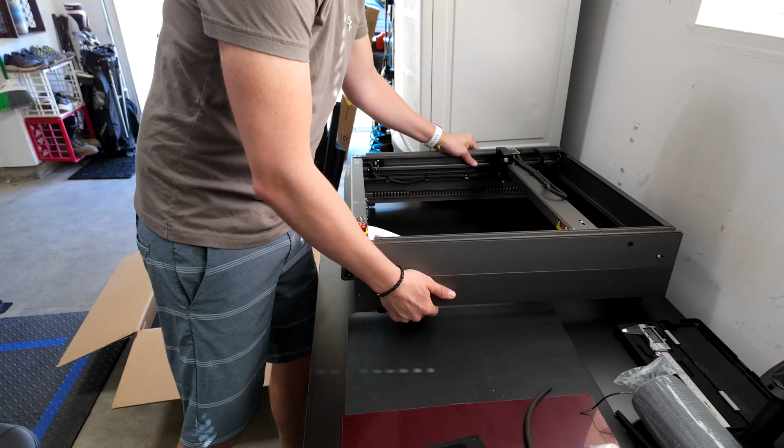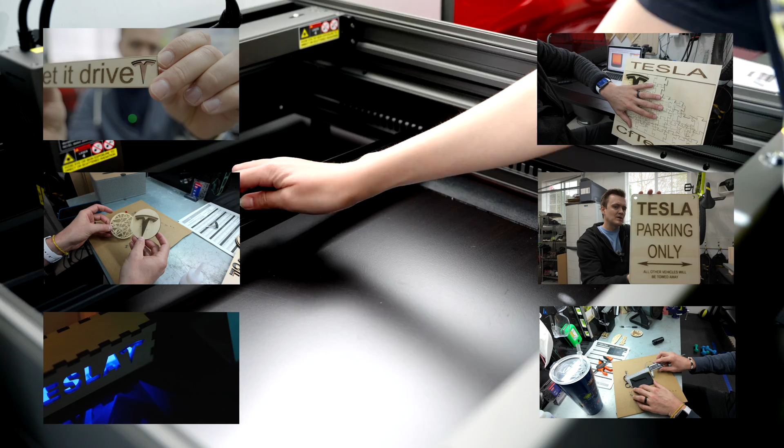I've listed everything right here on the screen. You can see the 4, 5, 6, I don't know how many it's gonna end up being, different projects that I've attempted to make here or engrave. I'll have some different kinds of projects I'm gonna try and make, and then I'm gonna engrave different things with neat designs. Now keep in mind, I have never done anything like this before, I've never used a machine like this. So on this journey I've learned a ton. If you're watching this video, I've had this thing for about a month and a half to 2 months, so let's hope the stuff you see only gets better from here. But what will be impressive is the capability of a machine like this.

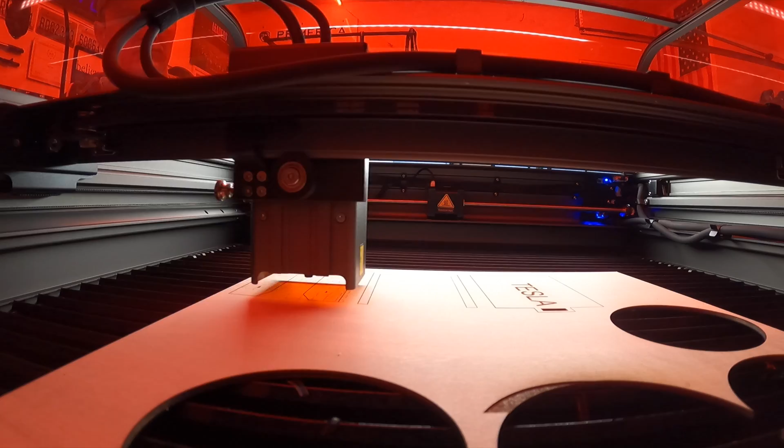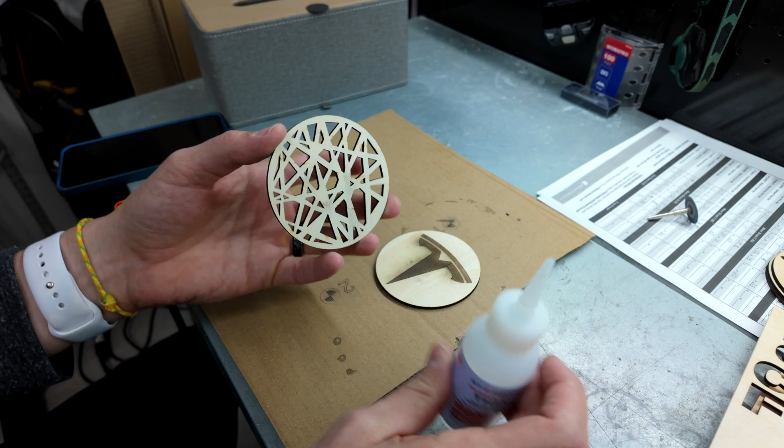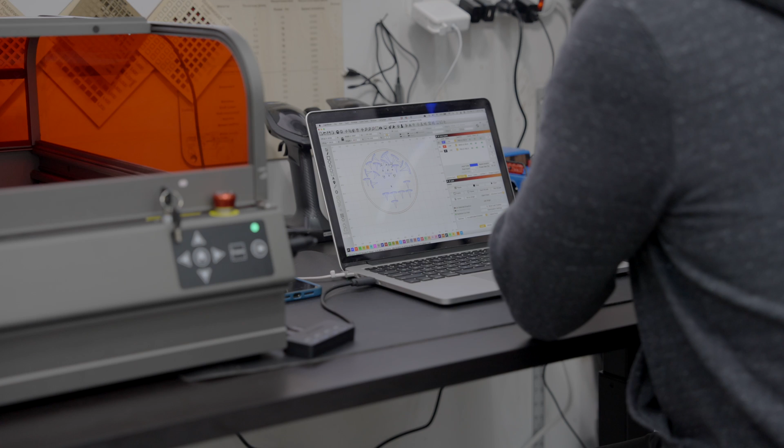So let's get started with my first, I guess, Tesla accessory. My first project that I wanted to make was a coaster because I figured it'd be pretty simple and there was a lot of different ways I could learn how to use this machine. I made a couple different designs, from just a little squiggly line pattern to an actual Tesla symbol engraved in a very plain circle. I then totally unplanned decided to glue one onto the other, putting the Tesla symbol kind of like in a little cage behind it, which came out pretty cool and was kind of fun to look at. But I really wanted to test just how fine this laser cutter could actually cut, so I wanted to make something a little bit more intricate, so I started off making a new design.

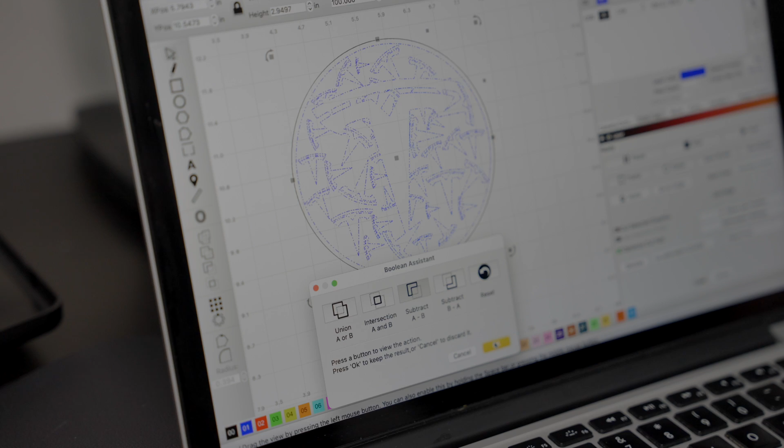The first thing I did was hop on a software program called LightBurn. I started putting little Tesla symbols all over in the circle, and very quickly, as you can see, it started looking just like a pizza. But I do like my Tesla and I do like pizza, so I figured let's keep pushing forward. To counter the anchovy-looking Tesla symbols, I took a large Tesla symbol and stuck it right in the middle, hoping it would make it look just a little bit better, which you'll have to be the judge of later - I'm still undecided. Then, using the super impressive camera feature inside of the Falcon2 Pro, I was able to place it exactly where I wanted it on the piece of wood inside the laser cutter. Then I pulled up the live view and waited very impatiently for it to finish.

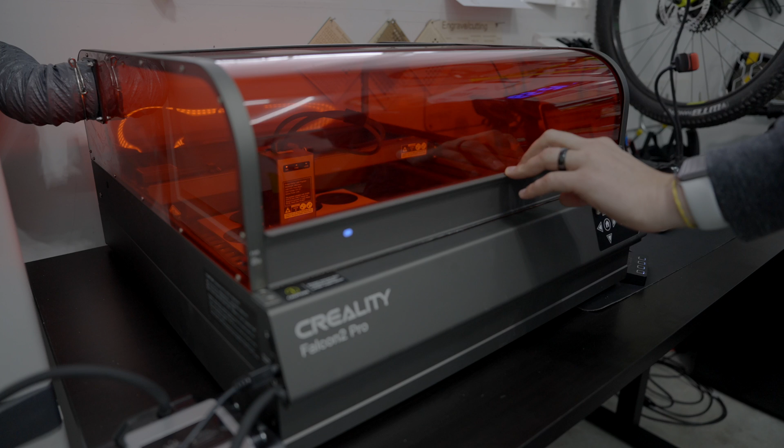All right, it just finished. It took about 3 minutes, and take a look at this detail. Look at this - it is just insane just how sharp it actually was able to cut that. And watch this - that slid right out of the middle just perfectly. And this thing's pretty cool too, it's like a little Tesla symbol tree.

All right, so after a few different failed attempts, here's the final result for my coaster. Using a total of 2 different circles, I started off with engraving the Tesla symbol in the middle, then cutting out all the tiny little Tesla logos all around it, and then cut out one large circle for the back and simply glued it all together. And I think it turned out pretty cool.

The next project I'm gonna try to make is an actual key holder for your fob. So you have these little Tesla car keys that we all use, and it's nice to have something like this to slide them into when you're going to things like valets and whatever, to hold them.

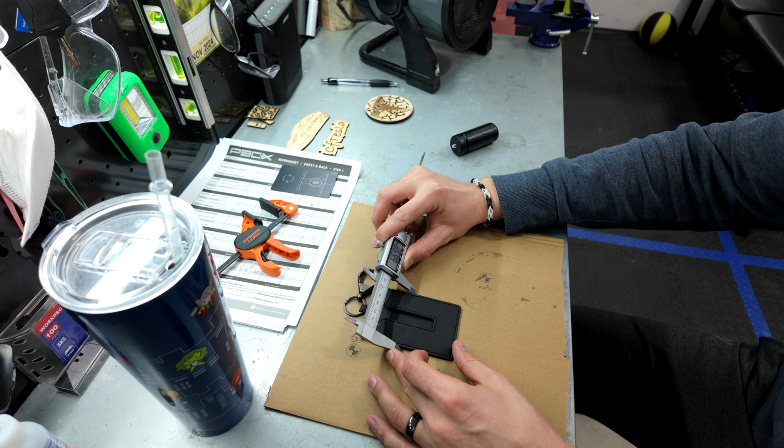Now I don't have the proper materials for this because it's gonna end up being super thick versus super thin, but we're gonna do it anyway as a fun little challenge. To get started, we're gonna get all the right measurements, both the length and the width. The thought is that I'll print out one square in the back, cut a really thin layer around this edge to give us a little bit of depth, and then cut this design in the front so we can slit down into it and try to duplicate this exactly. Of course, we'll put in the Model 3 symbol and maybe some Tesla logos as well. I've got the wood all ready to go. I'm not really sure how this is gonna turn out, but I'm pretty excited to find out.

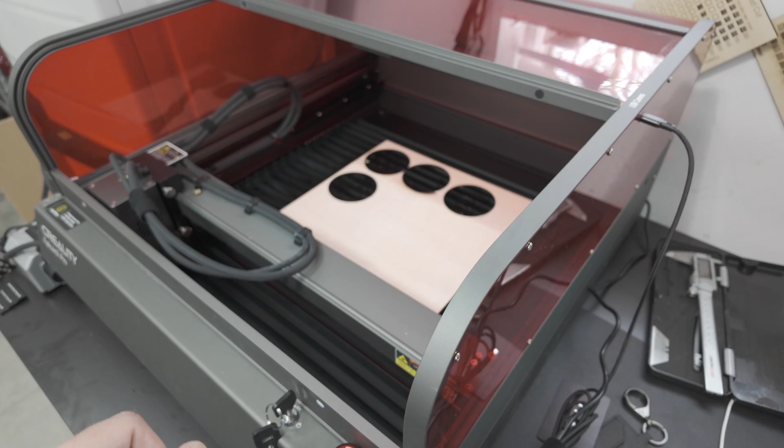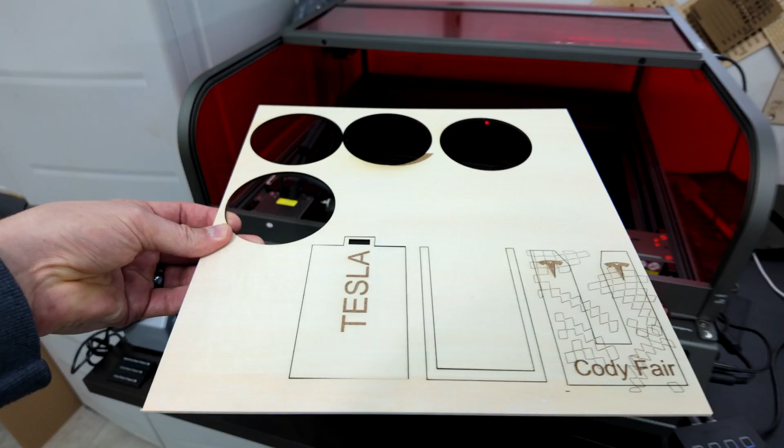All right, check it out. They're all ready to go. So this is all the different pieces right here. If I lift this thing out, hopefully these will all break out of it, which they all easily did pop out. Get this last little piece.

So this is gonna end up looking like this. We'll have this piece down there, then I'll glue this in the middle. See, I told you it's gonna be thick. And then this piece will go on top like that. Of course, like I said, you would really be making this with something like leather, not with this, but it still can show you what this thing can do and what you can make with it. So this is gonna be kind of fun. Let's glue it together. And there it is, our Tesla keychain holder.

We got a little slot for our card. We got our place to hook it to our keychain. We got our cool Tesla logos. We got our design and our name on there. And that was pretty fun. Of course, if this was made out of leather, this would be all much tighter, and we wouldn't worry about the phone or the card actually sliding out of there. But the concept worked. I just need to get some leather to try it.

All right, so for my next challenge, I'm gonna be making bookmarks. I'm a huge reader, I love reading. I read literally every day for hours - well, maybe not hours, more like minutes. And it's actually really not reading, it's more like listening to audiobooks. So I'm gonna make some bookmarks out of wood as well as making some out of acrylic.

So take a look at this one. I made this one out of wood for my Let It Drive clothing brand. Pretty cool, huh? I mean, it's not super cool, it's actually pretty basic, but take a look at the Tesla symbol - this is what I wanted to show you. Focus. Look how precise this 22-watt laser was able to cut this. That tiny little piece of wood between the top and bottom of the Tesla symbol, it was able to cut that and not break. I don't know, maybe that's not impressive, but I'm impressed.

And now inside of here, I had it cut the exact same thing with acrylic to see what the difference is. So let's give it a try. Right now, this is what I have with the acrylic, just a basic outline for the bookmark.

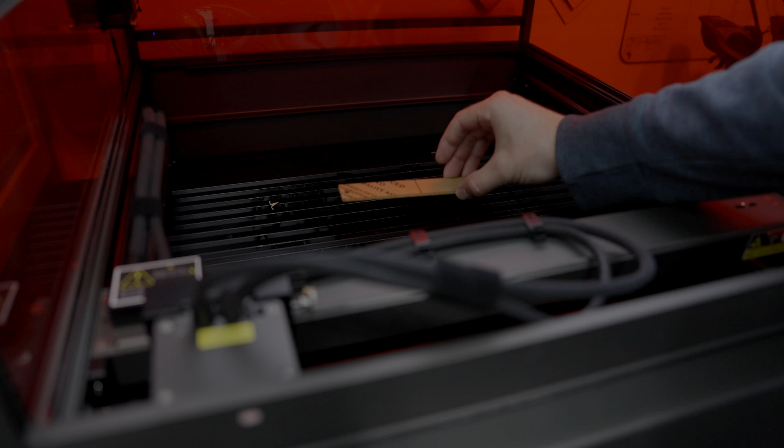So next, to get the engraving on the front of this, I'm gonna use my favorite feature about the Creality Falcon 2 Pro, which is the camera. This makes lining up what you wanna put on here just so simple. Check this out - I'm just gonna set this on here just the way I like it. Because you get all these customizable little bars in here, you can make them narrow or wide apart depending on what you need. So I got 3 right here nice and tight together.

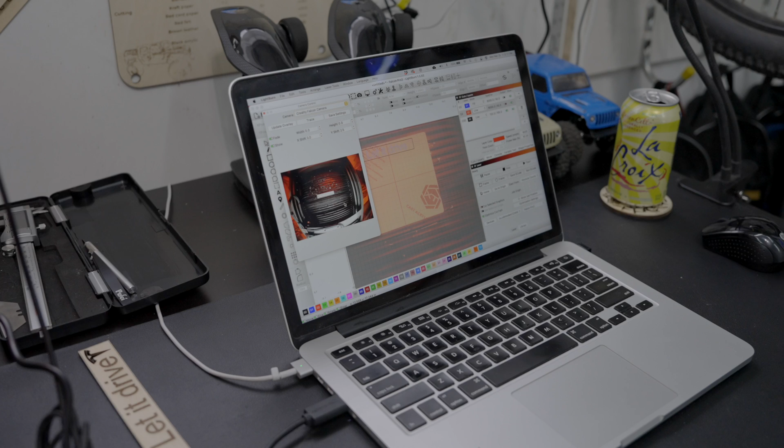I've got this placed on there the way I want it. Now I'm gonna come over here to my camera controls, and you can see here, I've got a live view of what's going on inside of the laser cutter. So for example, I put my hand in here, you can see my hand is right there - it's a real live view. And what I can do here, I'm gonna slide this back over here, is I can hit update overlay.

That's gonna take a right-now snapshot of what's currently going on inside of the laser cutter. As you can see, my piece of wood is right there. Now all I have to do is grab my object that I made and overlay it exactly where I want it, which is gonna be about right there.

Now, because this has an enclosure, even though I've framed it up and it's ready to go, all I have to do is click start on my computer. It won't start right now because this is opened up. It's a really nice safety feature so you're not gonna blind yourself, because with the way this is set up, you don't actually need these fancy safety glasses. It's fully enclosed all the way around—sides, top, everything—so you get viewing angles from every direction. But once this is closed, you see it turns on, and now it's ready to go, and I can stand right here and watch it.

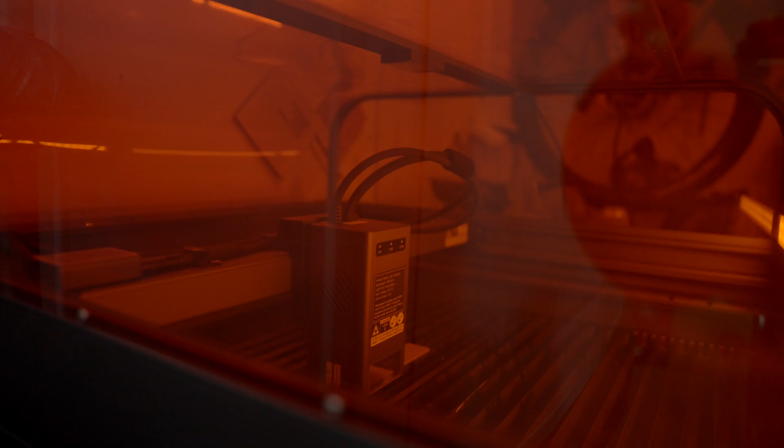So let me show you what's going on here. This right here is an air pump, pumping air through this tube—I don't know if you can see it too well with the glare of the window, but it's going right there onto that tube on top of the laser cutter. Then you get this ventilation right here, and inside there's actually a fan. I have that run all the way behind here, and it's ventilating out my window right here.

The way I have this set up, if I'm gonna be working out or doing something else in here, I can just pull that out, close the window, and then hook it right here on this little nail. I also went and bought this stand-up desk so it can be lower or higher depending on the kind of work I want to do at the moment. So I'm pretty excited about this little workstation.

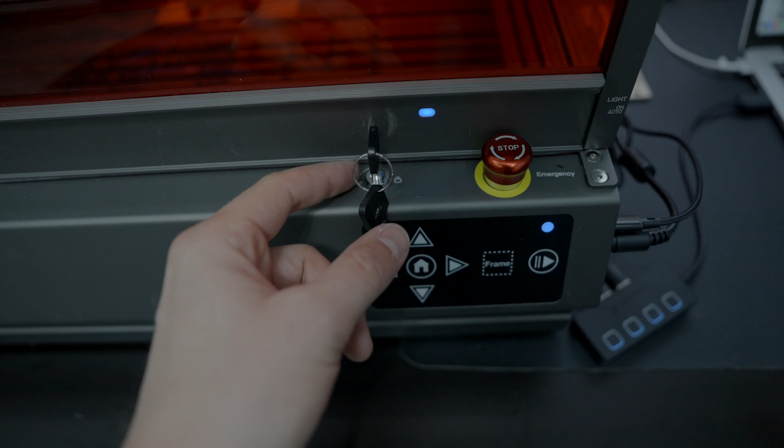You also have this safety shut-off. You can lock it right here so no one else can open this up, get hurt, or use it. You have the option to make the light auto or just stay on—there's a bar light down underneath here. Same thing over here with the fan; you can have it set to auto or just turn it on.

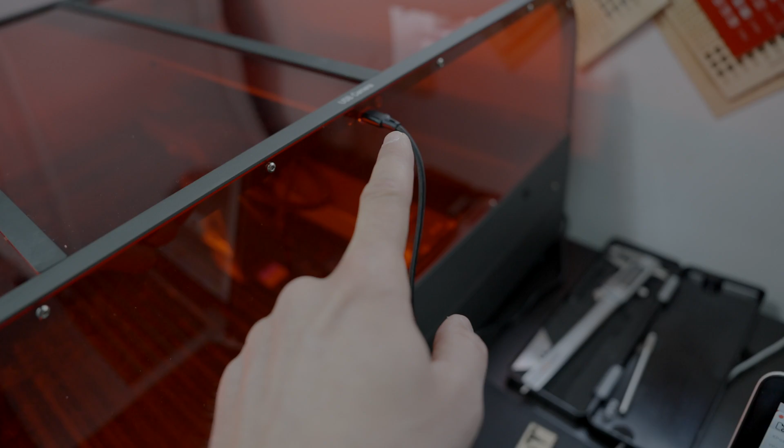And then here's how all the connections work. So you have your power, then you have your USB-C connected to my little USB dongle to my computer. The other cord connected to the dongle goes up here to the USB-C port that goes straight to the camera—a really fast connection, works flawlessly every single time. And then of course it goes to my MacBook, which is running Lightburn.

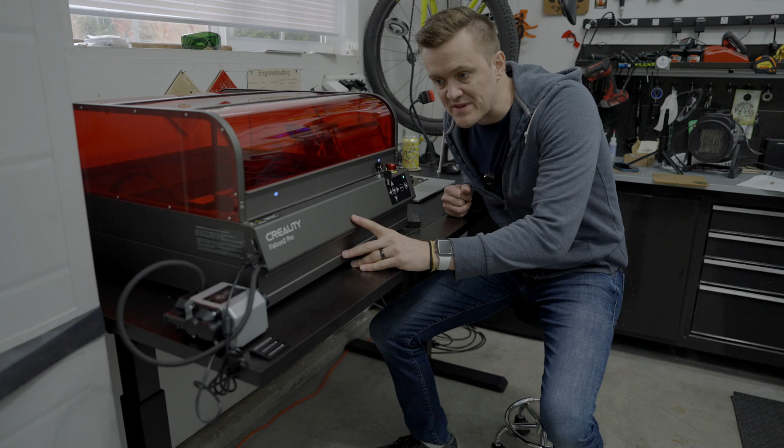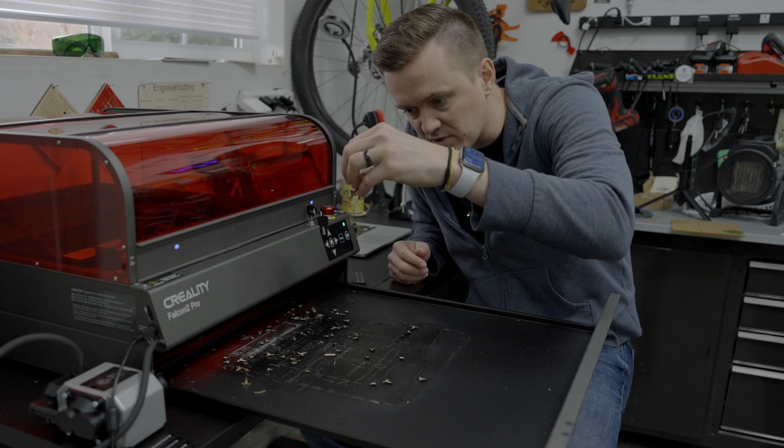Another feature about this guy that, to be honest, I don't know how all of them don't have, is this monstrous drawer you can pull out here. That's how you get rid of all your little Tesla symbols and whatever other wood chips and junk you have in here. Really nice and easy. One thing I'm realizing too is it's protecting my table underneath this from the laser, because otherwise I guess it just goes right through to the table.

Now of course, after it's done, there is some work you have to do to get it all ready to go, such as picking out a little bit of the protective sticker that goes over top of the acrylic and on the back side. I found that a little Exacto knife and some tweezers are a really good set of tools to do this.

And here it is, Let It Drive. This is the transparent acrylic. So here we have both—the Let It Drive with wood, and the Let It Drive with the acrylic. When you put the transparent acrylic on top of the wood, the engraving looks like a shadow for the acrylic. How cool is that?

Now this next project is gonna be my favorite by far, and we're taking it to a whole other level. What we're gonna be doing is building a box, like a sign box, that's lit up with LED lights for Tesla. I made a little mock version of this out of cardboard, but the real one's gonna be a little bit different, with a base on it, and of course it's gonna have RGB lighting inside of it. So here's how I'm doing this.

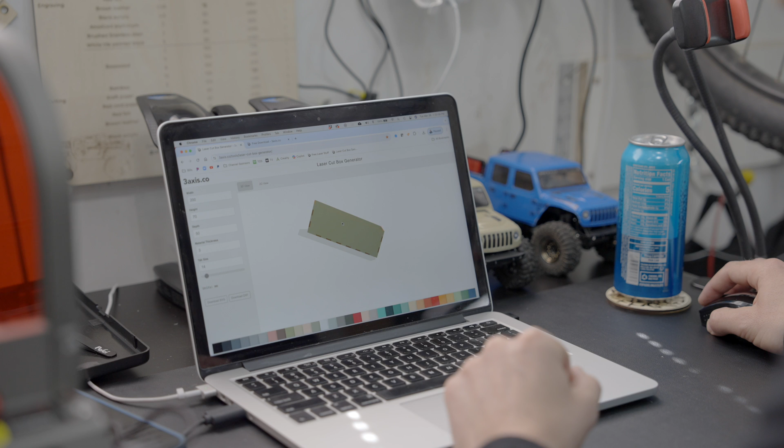First, I went online to this laser cut box generator and generated the size of box that I wanted. Then I input it into Lightburn, added my Tesla graphics, created a hole large enough to fit the LED lights through, set my power and speed, and then clicked start.

All right, let's take a look. Let's see if I got the speed and power correct. Oh yeah, easy. See, it's all falling out already.

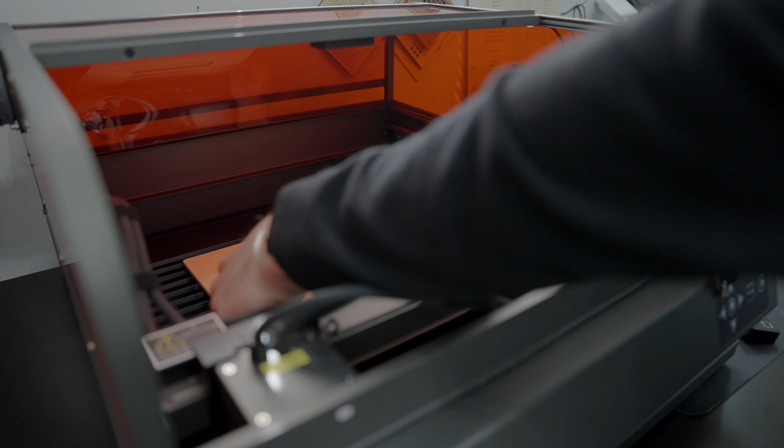So this one I did with 5mm basswood, and I want this one to hopefully turn out well so I can put it in my office because I just love things that glow. So hopefully this all actually works.

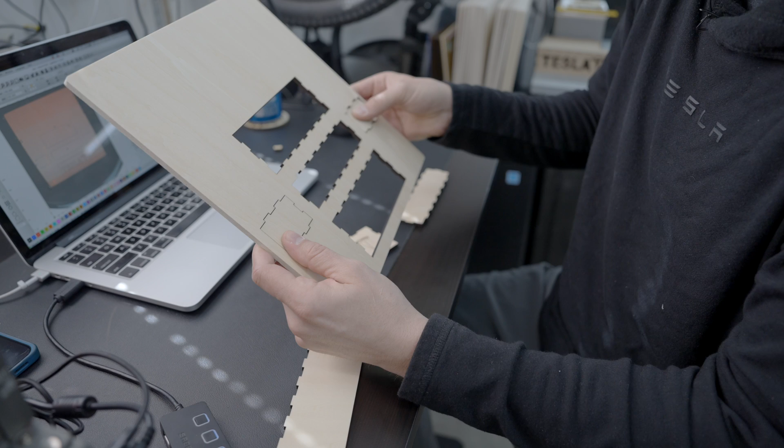So just a little tiny bit of cleaning up to do on that one, but most of these are coming out. This one as well, I'll have to do a little bit, just not fully cut through on that back end there.

Okay, so we got all of our pieces. We got the Tesla symbol right here. We've got the back, which has a spot for the USB or LED lights to come out and plug in. We have the two sides, the top and the bottom. And of course, because I don't want to do this twice, we're going to glue it together.

So that's what it's looking like so far. I have the top and I have the sides on it, but I'm going to leave the back off until we put the LED lights all along the inner part here, and then I'll run them out that little hole in the back and we'll complete it.

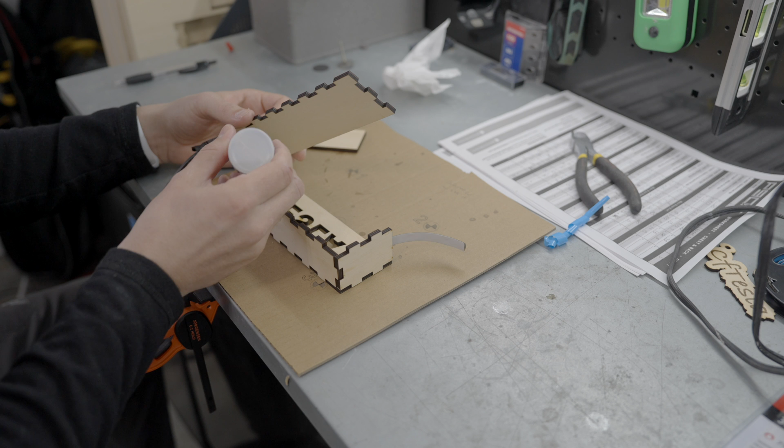All right, and there it is. And because it's RGB, of course, we can change the color.

So that was a very cool little project, and it's one that I'm actually going to use inside of my office, but there still was a lot of mistakes made with this. For example, I didn't get the bottom quite perfectly straight, so it's a little bit offset, as well as I didn't even think about the fact that the A was going to cut out the entire middle. I should have left a little line down there to hold that center. But for my first try on something like this, I'm happy with it, and it looks really cool in my office.

My second attempt, when I made one for my YouTube channel brand, came out a lot better. I put YouTube on one side, a little Tesla symbol on another, and the YouTube logo on the other.

Now, of course, I couldn't test out a laser cutter without making some kind of a sign for my garage. So of course I went with the typical Tesla parking only, all other vehicles will be towed away sign. And what's so cool about these laser cutters is you can even tell it to cut out little holes like this, so I have a spot to really just hang it on some nails on the wall.

Stuff like that sign are a really great example of the power of a good software program like Lightburn with a really capable laser burner machine like this one, because that sign, I just found a random picture online of it, put it in the program, had it trace it, and then with a couple of clicks, I've got a cool sign for my garage.

And you can do that with pretty much anything you can find if you want to burn it onto a piece of wood or acrylic or something like that.

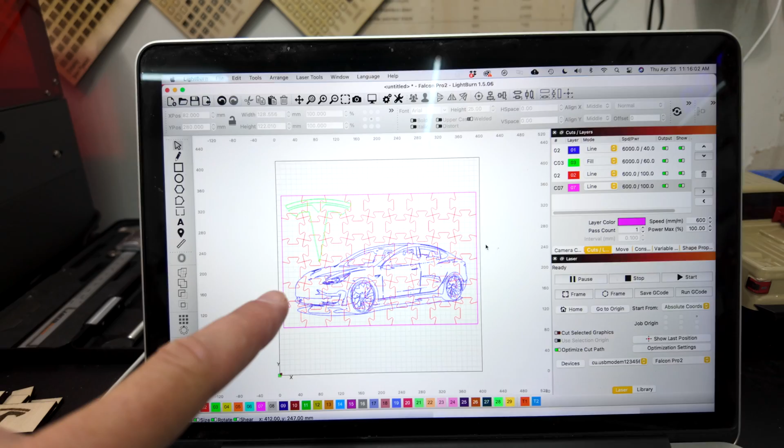Now the next project I'm going to make with the Creality laser is a Tesla jigsaw puzzle. You can download a template online, create your own design, just as I've done right here using Lightburn. What I did was I took a picture of a Tesla Model 3, used a program to trace it, added a Tesla logo in the background, then I'm going to have it fill out, and then it's going to cut out this puzzle.

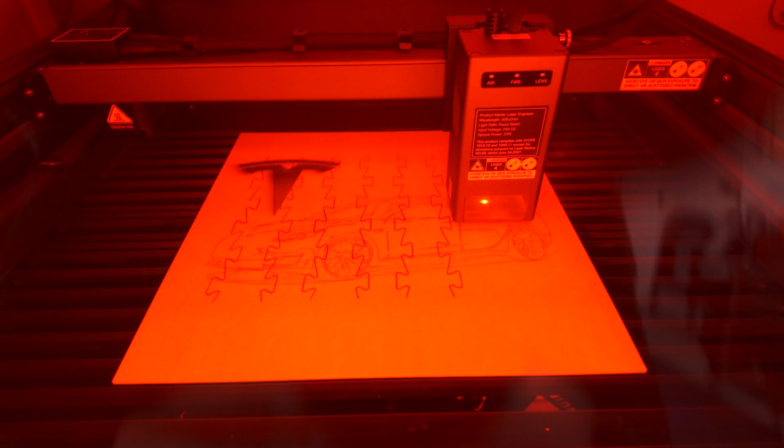All right, here it is. This is our puzzle. So what I did is I basically took a full sheet and used the whole thing.

On the top is the Tesla logo, my YouTube channel on the bottom, and I engraved a Tesla Model 3 in the middle, which I would have probably done a little bit darker looking at it now.

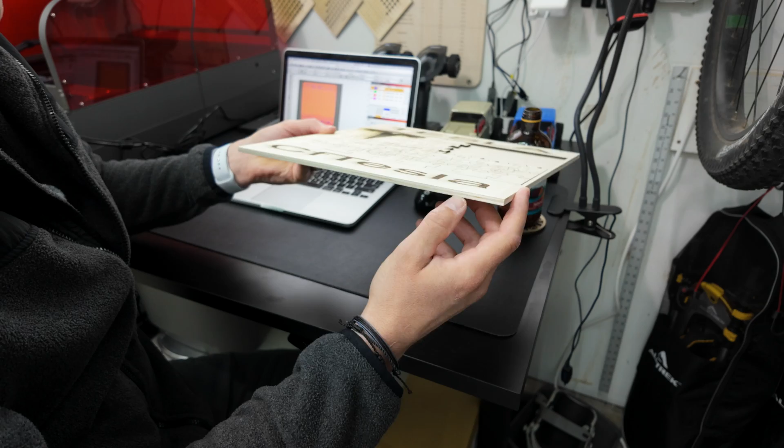And then I put a deep engraving of a Tesla symbol here, and had it cut the puzzle pieces out. So now we've got a pretty awesome puzzle. I then took another sheet of 3mm basswood and glued it to the bottom of this one, so we actually have a base to build the puzzle on. I think it came out really good—the precision of the cuts is absolutely perfect. The puzzle pieces fit in there really nice, and just one more piece and it's gonna be done.

So these are 5 examples of things that even brand new rookies with no experience can do in their first month of owning a laser cutter like this. I didn't think I would even get into 3D stuff, but I've dabbled in that a little bit, like that glowing sign that I made.

But even if somebody wanted to make a store, maybe an Etsy page, and sell some of this stuff, people can send you custom designs, custom pictures that they want, and you can build little puzzles for them for games or for gifts or whatever.

For example, take a look at this. A friend of mine realized I had one of these machines and was learning how to use it, and he asked if I would make him something for him and his wife's anniversary coming up. So what he wanted me to do is build a glowing, again with RGB lights, heart like this that has their names on it and their anniversary date.

Take a look at the precision on this. The wood on the top is all bent—the laser cutter just came in and sliced and cut that, so I was able to just bend it around like that. Of course, I still have to redo this whole front here because I haven't quite figured out, even though I know how to do it, how to not just have giant holes for things like B's and O's and all that stuff. But I'll get that figured out.

And then this will have RGB lighting that'll glow, can sit on a shelf and be really cool. You can make stuff like this and sell it for really good money on your online stores if you guys are into doing that kind of thing.